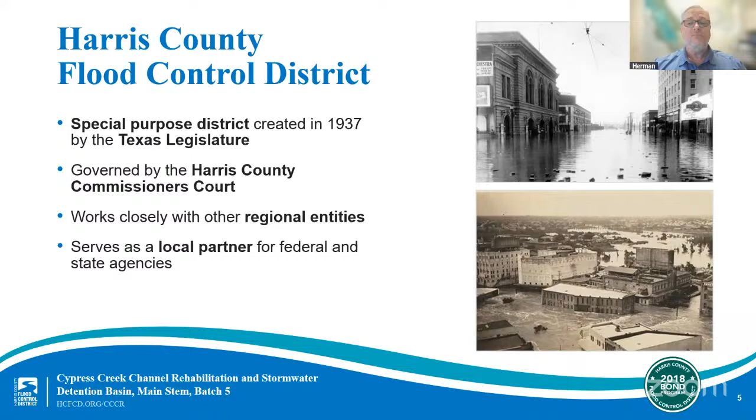The Flood Control District is incredibly unique in its mission. In addition to the unincorporated areas of Harris County, we also have 32 municipalities within our boundaries. Our agency can partner with these other cities, precincts, and local agencies to work together on flood risk reduction projects at both the local and regional level.

So not only do we plan and implement new projects that expand and improve our drainage network, but we also have maintenance teams working day in and day out to keep our bayous and channels ready when the next storm hits. In fact, it's built into our mission to plan, implement, and maintain flood risk reduction projects guided by community and natural values. The last part, guided by community and natural values, is so central to who we are.

And it's also one of the most difficult challenges we face. Building projects that not only reduce the risk of flooding, but also respect the needs of the community and the environment, especially in a highly urbanized area such as Harris County. That's why your input at meetings like these matters so much.

I'm sure it's safe to say that everyone joining us tonight probably knows that Harris County is prone to flooding. But why? Not only do we have extreme rainfall events like tropical storms and hurricanes, but our land is flat, which means stormwater often moves slowly when making its way to bayous and channels. And to make things even trickier, our clay soils don't absorb stormwater very well. Instead of being absorbed, stormwater just collects on the ground, creating a pooling effect, thereby increasing the risk of flooding.

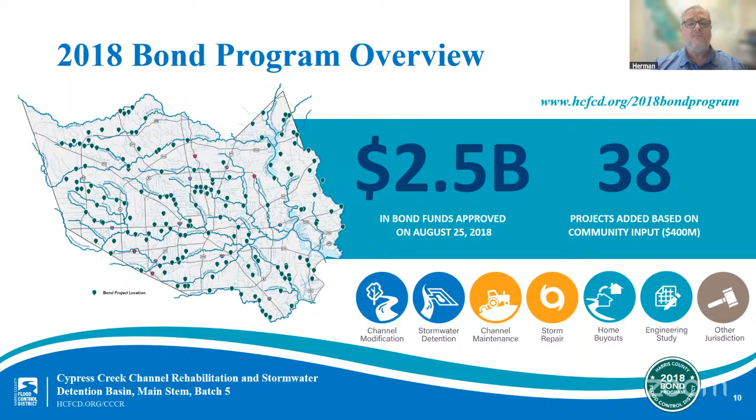As these bond projects move forward, we're making real progress in building a more resilient Harris County. So far, from the most recent data, we have completed 43 bond IDs, secured $2.7 billion in partnership funding to keep the bond program moving forward, and hosted more than 200 community engagement meetings.

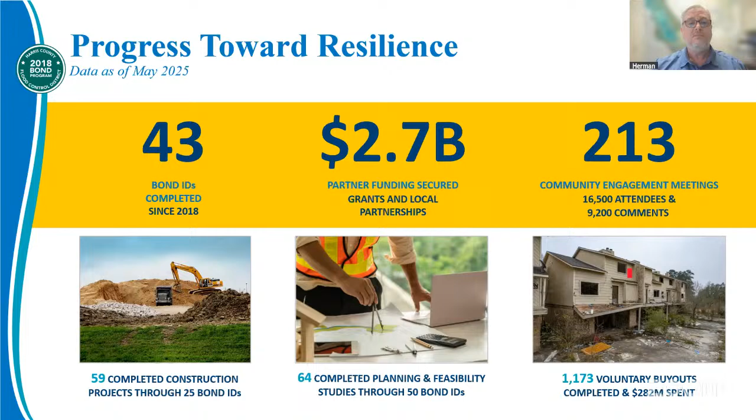It's important to note that even though voters approved $2.5 billion for the 2018 bond program, the estimated total cost of every project on our bond project list is actually much higher than that. From the very beginning, we've been clear. In order to see all bond projects through construction, we need funding partners.

Think of it this way. Multiple bond IDs on the list were funded for the feasibility study or preliminary engineering to see what projects may be possible to reduce the risk of flooding in certain parts of the county. Without this important first step in the project lifecycle, it's impossible to know what potential projects are even possible or determine how much it might cost.

The good news? So far, as I mentioned, we've secured more than $2.7 billion in partner funding to help move projects forward across Harris County. Each funding partner has its own guidelines. Some have specific requirements for the types of projects they will consider funding, while others may require a local funding contribution. The Flood Control District has an experienced and dedicated team that works very hard to match each project with the right funding opportunities, making sure we maximize every dollar to bring the most benefits to the community.

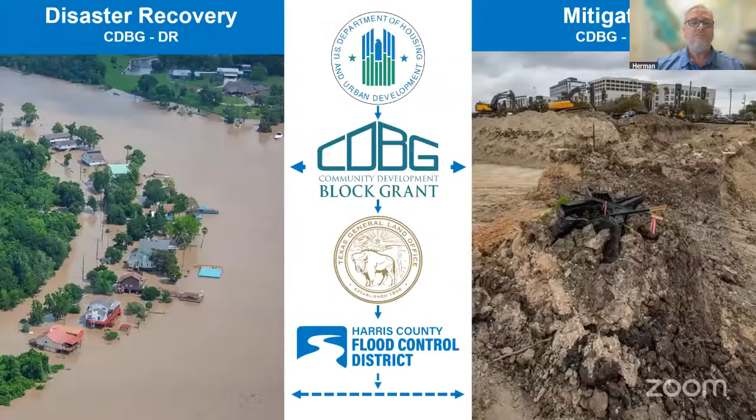Now I'll share a little more information on the cost and funding partners for this project. First, the engineer's estimate for the Senger Stormwater Detention Basin Phase 1 and channel rehabilitation at I-45 and the channel rehabilitation at Kuykendahl and Cypress Hill Stormwater Detention Basin is about $55 million. This is the estimated cost to see both packages through to completion as of today.

I want to highlight one funding partner for this project, the U.S. Department of Housing and Urban Development, also known as HUD. The Community Development Block Grant Mitigation Program is one of the funding programs under HUD. Mitigation funding focuses on mitigating the risk of future flooding in a community. The Texas General Land Office, or GLO, administers the grant program at the state level for HUD. This means the GLO distributes funds to local, county, and state agencies that apply for and are approved to receive CDBG mitigation funding for projects designed to reduce the risk of flooding in the future.

The Flood Control District has been awarded approximately $541 million for projects meeting the requirements. This project is receiving approximately $53.7 million in CDBG mitigation funding. All Flood Control District projects receiving CDBG mitigation funds must be completed by March 31st, 2028.

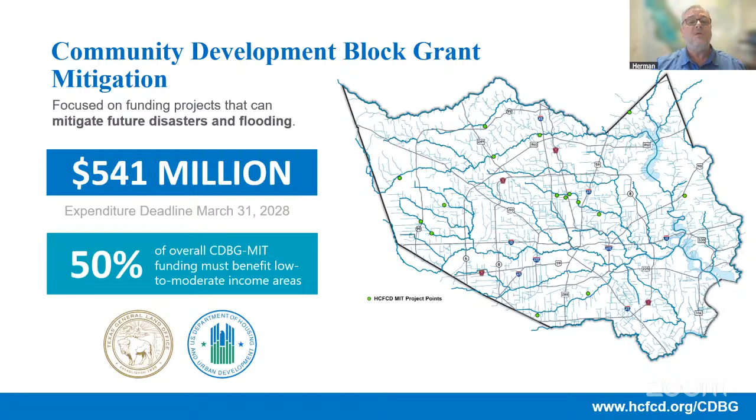Now that we've shared some key background information, we'll get into the important details about this project. Before we do, just a quick reminder, we would love to hear from you. As we go through the project details, please feel free to drop any questions or comments into the Q&A box.

And with that, I'll hand it over to Jonathan St. Romain with the Partnership and Programs Division with the Flood Control District to share more about the Cypress Creek watershed and the Batch 5 packages. Jonathan, over to you. Yeah, thanks, Herman. So first, I'll share a brief overview of the Cypress Creek watershed and this project, and then we'll discuss key project updates.

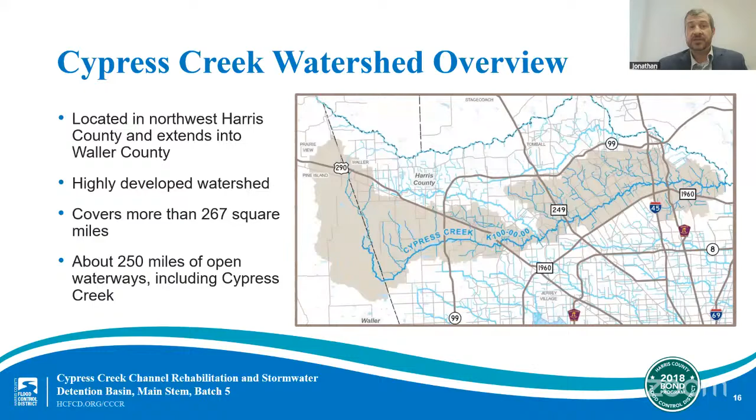The Cypress Creek watershed is located in northwest Harris County, and it extends out into Waller County. It's a highly developed watershed with a large amount of development occurring before current regulations were in place. Rainfall within the 267 square miles of the Cypress Creek watershed drains to the watershed's primary waterway, which is Cypress Creek, but there are 250 miles of open waterways in the watershed, including Cypress Creek and its major tributaries.

The Cypress Creek watershed, like the rest of Harris County, has a long history of flooding. Records of flooding events date back more than a century. And interestingly, historical high water marks along portions of Cypress Creek indicate that an October 1949 flood was the highest known flooding event until Hurricane Harvey in 2017. In the Cypress Creek watershed, the 4-day Harvey total was a record 29 inches and flooded approximately 9,500 homes.

And so now that we've provided a background on the overall Cypress Creek watershed, let's get into the details and history of this project. This is a community input project under Bond ID CI-012 and involves major maintenance along Cypress Creek and its tributaries.

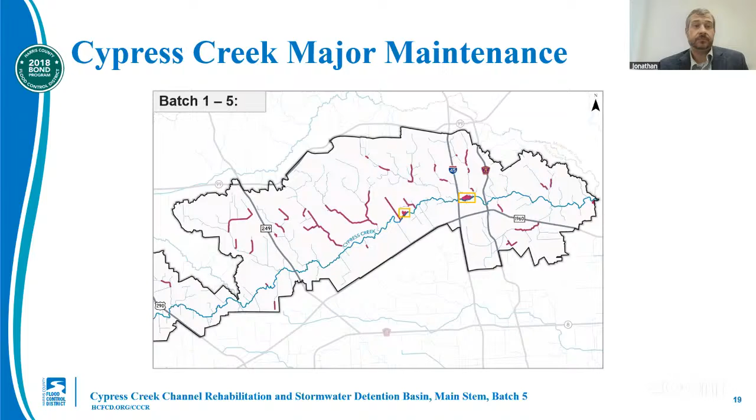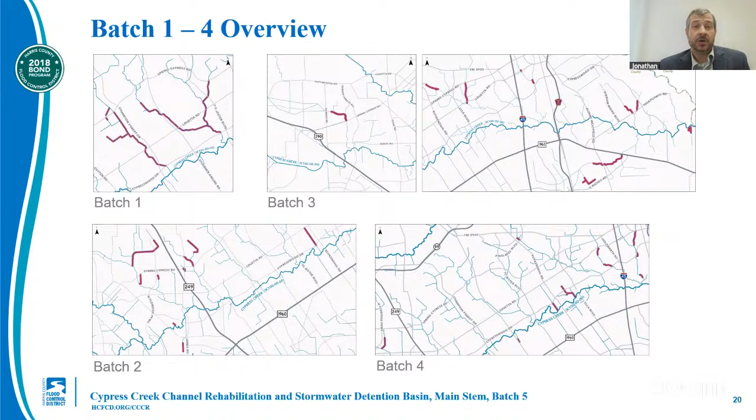But before we review batch 5, let's take a look at batches 1 through 4. These batches consisted of major maintenance and channel repairs. So far, batches 1 through 3 have been completed, and batch 4 is in progress, and it's estimated to be complete by the first quarter of 2026. Overall, batches 1 through 4 include channel restoration to approximately 24 miles along Cypress Creek and its tributaries.

Batch 5 is the final batch. It includes 2 packages. First, the Senger Stormwater Detention Basin Phase 1 and channel rehabilitation at I-45, and second, channel rehabilitation at Kuykendahl and Cypress Hill Stormwater Detention Basin. Batch 5 is unique because it includes work on the main stem of Cypress Creek, and it also includes 2 stormwater detention basins to mitigate the channel rehabilitation to ensure there are no downstream impacts.

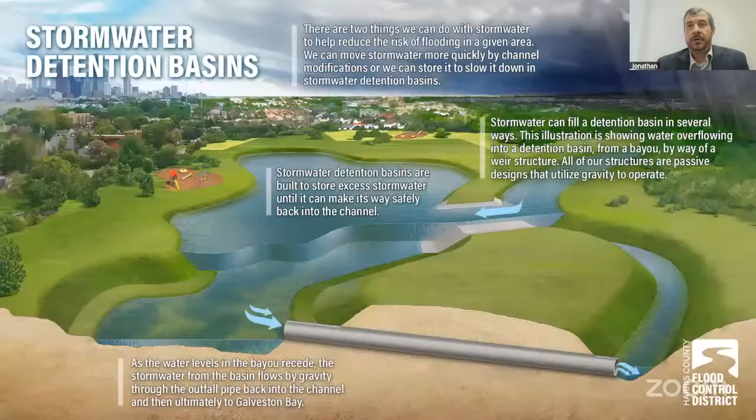So let's take a moment to talk about stormwater detention basins and how they help with flood mitigation. While channel conveyance improvements or channel rehabilitation packages like the ones we're talking about tonight help stabilize the banks of the creek and move stormwater more efficiently out of an area, stormwater detention basins hold the stormwater in one place, but only temporarily. These basins are temporary storage areas for stormwater runoff.

We strategically place them in the areas where they can catch extra stormwater and keep it from overwhelming channels and flooding downstream communities. Once water levels in the channel go back down, the stormwater that's stored in the detention basins flows through pipes back out into the channel and eventually out to Galveston Bay.

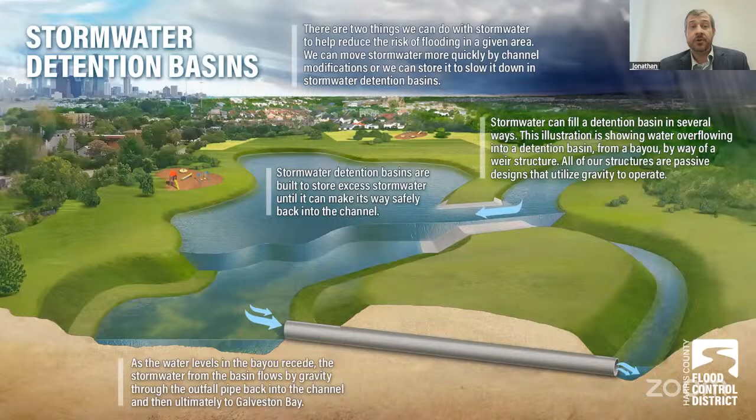As we mentioned before, the Flood Control District is a no adverse impact agency. That means we do not allow our projects to reduce flooding risks for one area while increasing risks somewhere else. That's why stormwater detention basins are often built before or at the same time as channel conveyance improvements or channel rehabilitation to prevent any unintended impacts downstream. So first, we give an area the ability to store excess stormwater, and then we find ways to move it out of the area even faster.

All stormwater detention basins serve the same purpose, temporary storage for stormwater, but they can be designed in different ways. Some are built as one large basin, like the examples shown here, while others are made up of several compartments that work together. Stormwater detention basins can also be either wet bottom or dry bottom. Wet bottom stormwater detention basins always have a permanent pool of water with extra space above it for storing stormwater during heavy rain. Dry bottom stormwater detention basins are lined with grass and are designed to drain completely between rain events.

Wet bottom basins can attract birds, which can enhance our community and natural values, but they also pose risks to aircraft and are not permitted in proximity to airfields by FAA guidelines. For this project, we're designing a wet bottom detention basin at the Kuykendahl location and a dry bottom detention basin at I-45 due to its proximity to George Bush Intercontinental Airport.

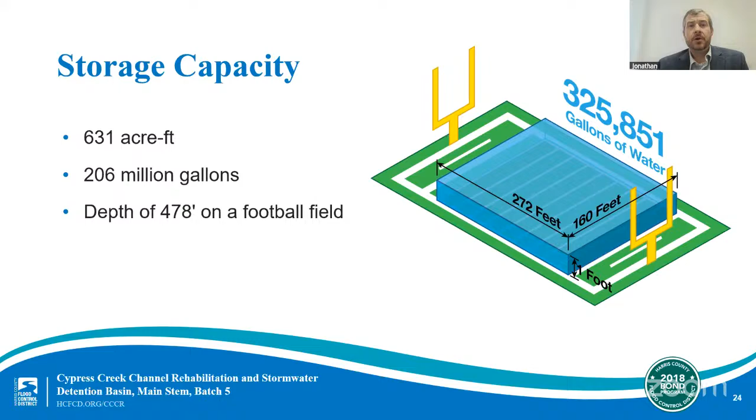With this information in mind, let's dig deeper into the objectives and design of the 2 packages that make up Batch 5. These channel sections have received extensive erosion over the years. The objective of this project and the channel rehabilitation is to stabilize the 2 channel segments by making the side slopes less steep, which will also help minimize erosion in the future.

Let's take a look at the Senger Stormwater Detention Basin Phase 1 and Channel Rehabilitation at I-45 package. This stormwater detention basin will be located at the I-45 frontage road intersection with Cypress Creek. It will be constructed as a dry bottom stormwater detention basin, and it's anticipated to provide approximately 483 acre-feet of stormwater storage. The property required to construct the basin is currently owned by Harris County and will be transferred to the Flood Control District before construction.

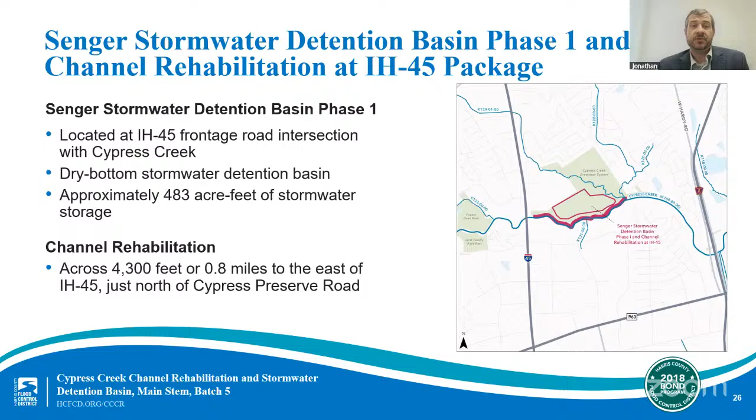The channel rehabilitation portion of this package will take place across 4,300 feet or 0.8 miles to the east of I-45, just north of Cypress Preserve Road. The other package is the channel rehabilitation at Kuykendahl and Cypress Hill Stormwater Detention Basin. The Cypress Hill Stormwater Detention Basin will be located at Kuykendahl Road and Cypress Creek. The property required to construct the stormwater detention basin was acquired by the Flood Control District back in 2018. This stormwater detention basin is anticipated to provide about 148 acre-feet of stormwater storage and will be constructed as a wet bottom basin. The channel rehabilitation portion of this package will take place across 3,000 feet or 0.6 miles near Kuykendahl Road.

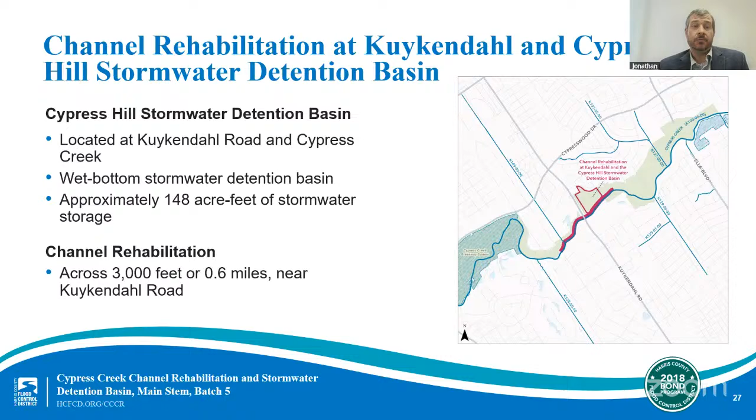In total, this project provides about 631 acre-feet of stormwater storage within the 2 detention basins. Pre-Atlas 14 100-year design storm models show water surface elevation reduction of up to 1 foot near the I-45 project limits. When we say water surface elevations decrease, we mean that a particular storm event will cause Cypress Creek to rise to a specific level today before the project occurs. But after the project is completed, that same specific storm event would produce a water level in Cypress Creek that's lower than before, so that flood risk to homes and people is lower. Overall, the benefit area of this project is estimated to reach nearly 40,000 people who either live near and or commute through the area.

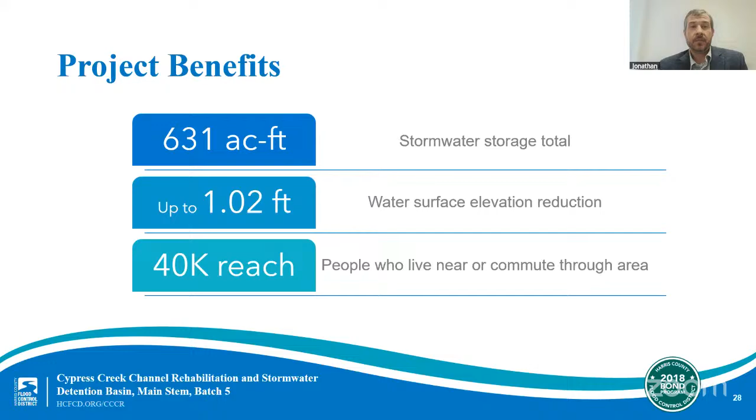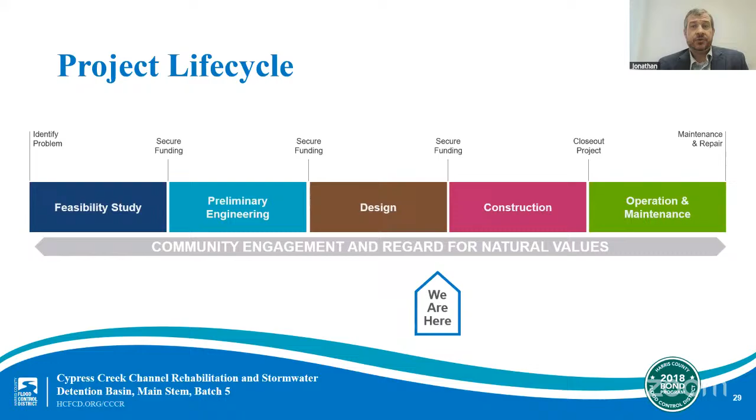The visual on this slide shows the standard life cycle of a flood risk reduction project. While every project is unique, they all follow a similar path, and there are certain milestones we expect to hit along the way. Right now, we're nearing the end of the design stage for Batch 5. And this brings us to our timeline and next steps. We're aiming to finalize the design stage by July of 2025. And when following our project lifecycle, after the design stage comes the construction stage. As part of our standard practice, the Flood Control District will advertise the project for bids. We anticipate both packages in Batch 5 advertising for bids in the second quarter of 2026. After the bids are received and reviewed, the contract can be awarded after approval from the Harris County Commissioners Court.

If everything progresses according to plan, the channel rehabilitation at Kuykendahl and Cypress Hill Stormwater Detention Basin package could be completed by the fourth quarter of 2027, and the Senger Stormwater Detention Basin Phase 1 and channel rehab at I-45 package should be completed by the second quarter of 2028. As we get closer to construction, we'll provide more updates to the community.

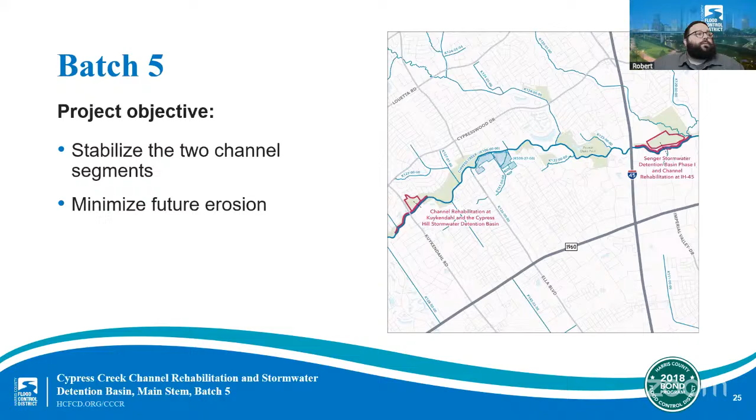Yeah, so that's a great question that we could talk for a while on. That's probably a little bit beyond the scope of this specific community engagement meeting. So I'll touch on it a little bit as it relates to these specific projects in this specific program, the Community Development Block Grant Program that comes from HUD, Housing and Urban Development, through GLO, Texas General Land Office. The answer is so far no. This funding has not been affected. I say so far, but that's what we're seeing on this one.

There's a lot going on with some of our other funding programs. FEMA has canceled its BRIC, Building Resilience and Infrastructure in Communities program, and so that's one that we can specifically talk about that has definitely been affected. And then there's lots of unanswered questions with some of the other programs that we have through FEMA as well as EPA and some of our other funding partners. So yeah, it's a great question with lots of moving parts, and we'll make sure to keep everybody updated as things change. But again, so far, no issues with these projects in this current CDBG program.

Thanks, Jonathan. Jason, back to you for this next question. So typically, maintenance projects do not also include stormwater detention basins. Can you please explain why 2 stormwater detention basins are recommended for this project?

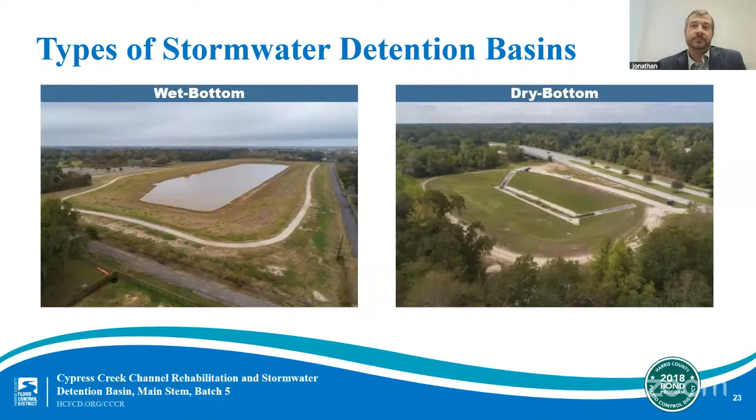Thank you, Jonathan. Jason, I have another question for you. This one is from Kevin. It is regarding the Cypress Creek Greenway. Have there been any discussions with Harris County Precinct 3, or are you able to share anything about Greenway access by the Senger Stormwater Detention Basin?

Sure. Yes, we have been coordinating with Precinct 3. We also are leaving quite a wide berm between the basin and the channel. That way we have plenty of room for any type of future trails or other amenities that would be added in this area.

All right. Thanks, Jason. Our next question is for Fidelis. Fidelis, we often receive questions about project timelines and why the construction process can't be started sooner. Can you please explain what steps will be taken between finalizing the design and advertising the packages for bid?

Yes, sure. From here, the team will review public feedback from this meeting and finalize the design of both packages. We aim to complete this by the end of July. Then we will advertise both projects for bids targeting Q2 2026. And between now and then, we obtain all the environmental approvals and receive authorization to utilize grant funds from GLO, currently projected to happen the first quarter of 2026.

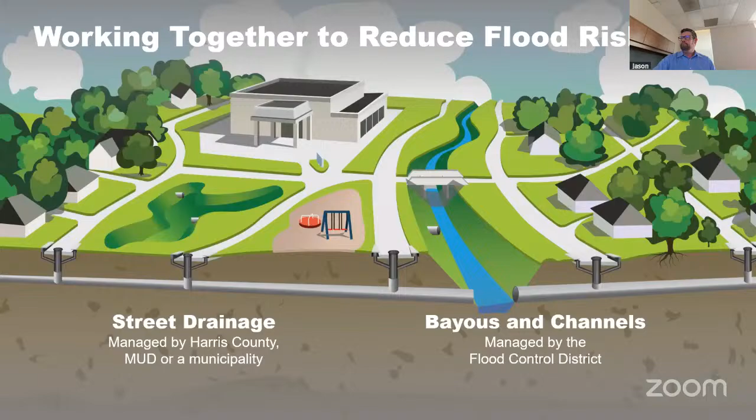All right. Jason, let me stick with you for this next question too. This one's from Mr. Rehack. Mr. Rehack, first of all, thanks for being here tonight. Mr. Rehack is asking if the flood reduction at I-45 will keep the freeway above water in the event of another event like Harvey.

Well, that's an interesting question for sure. I can tell you that the TxDOT project that was completed, where they raised the southbound frontage road, is definitely going to help that. And as Jonathan mentioned, we are looking at about a foot reduction along Cypress Creek for major events. Thanks, Jason.

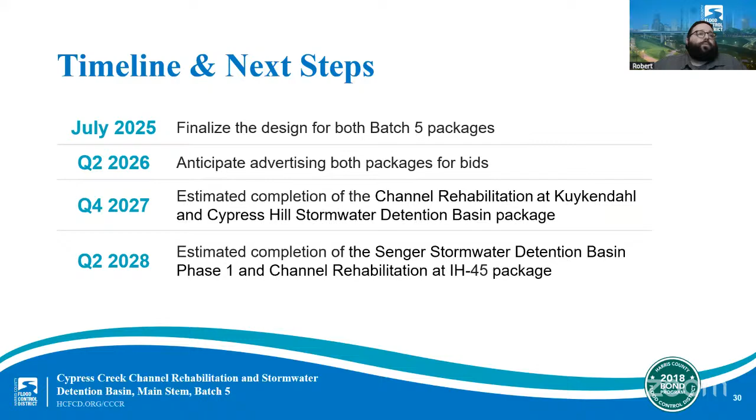All right, thank you, Jason. Our next question is for Jonathan. Jonathan, we talk about community and natural values being important to our agency. Can we talk about wildlife and any environmental concerns for this project and how we go about handling that?

Sure. We're taking proactive steps to protect wildlife and also follow all environmental guidelines to make sure we keep the project moving responsibly, especially because we're receiving federal funding for this project. There's even more extensive environmental due diligence that's required, specific to wildlife and species that might be living in the project area. There's potentially the alligator snapping turtle and the tricolored bat. And those are both being considered for federal protection.

We've prepared a wildlife assessment, and we're working with both state and federal agencies to make sure that we avoid harming both of these species or delaying the project if they do become officially listed for federal protection. In the Cypress Creek area near Kuykendahl, native freshwater mussels were found. These are not endangered, but we're still taking steps to protect them. And that includes doing a formal study or survey and relocating those mussels before any construction in the channel area begins.

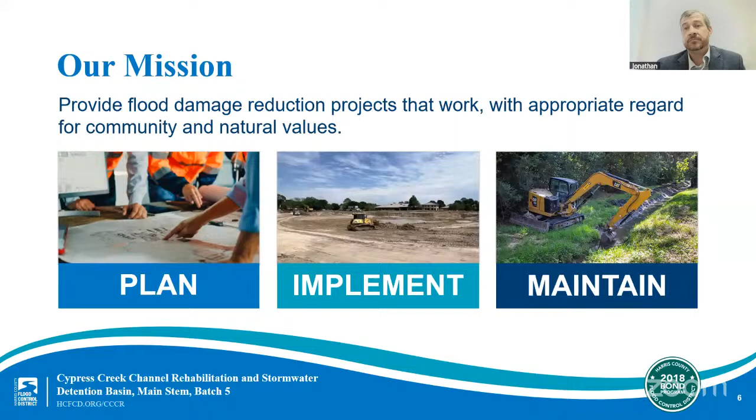Thank you, Jonathan. This next question is for Jason. Jason, maybe we can shift and talk more about the project footprint. We have a resident asking, with detention basins being developed next to the channels where channel stabilization work is occurring, will it be possible to leave an undisturbed section of the riparian corridor between the channel and the basins? And are you able to share anything regarding that with this resident? And also, thank you to whoever submitted this one, as it came in as anonymous. But Jason, over to you.

Unfortunately, based on the work that we're doing in the channel for the stabilization, we will be disturbing most of that channel footprint. But as far as long term, like I said, we will be coming back, not only looking at replanting within the basin, but also measures taken along the channels themselves, with additional live staking along the toe and other kind of biostabilization methods as well along the channel side for both of these channel segments.

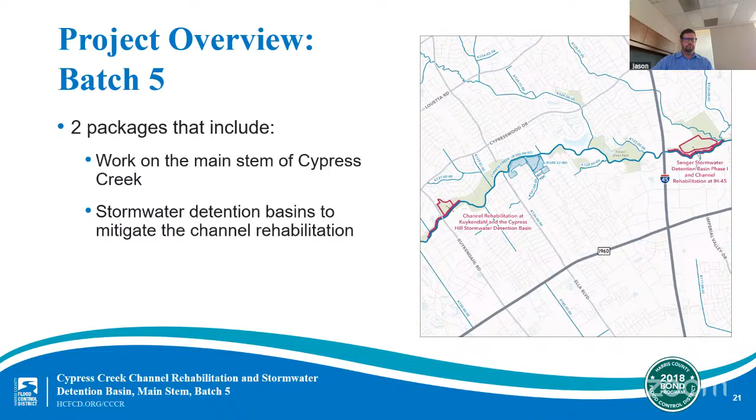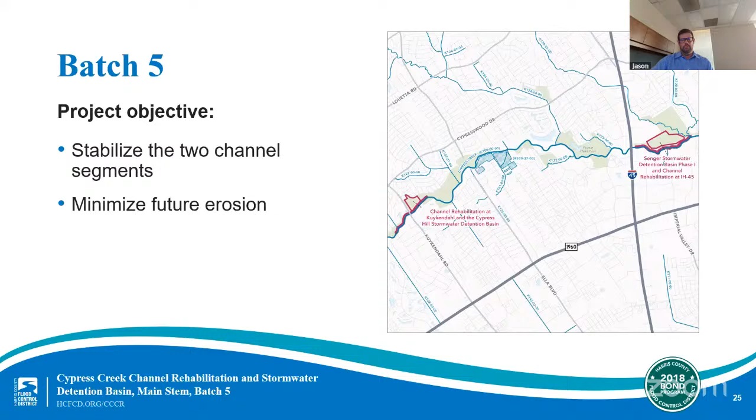All right. And Jason, this next question is for you. Where will the excavated material be disposed? Yeah, this is a question that we are asked often. The excavated material will be disposed at environmentally approved sites outside of the 500-year floodplain. All right. Thank you, Jason.